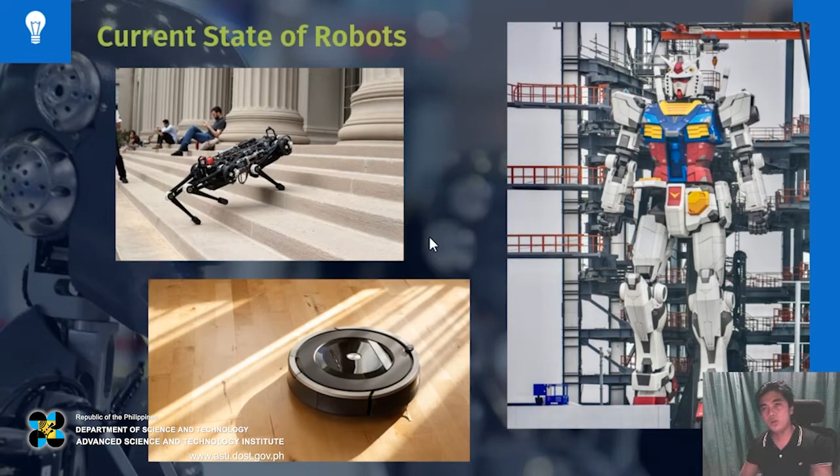That will be awesome. So starting with the current state of robotics, let us view more on what transpired for the age of robotics maybe in the last 50 years.

So anyway, diving deeper on the difference between the robots of yesterday and the robots of today, because the robots of yesterday were mostly enclosed in a separate room, in a separate space. Maybe there is this big glass in between, usually in factories.

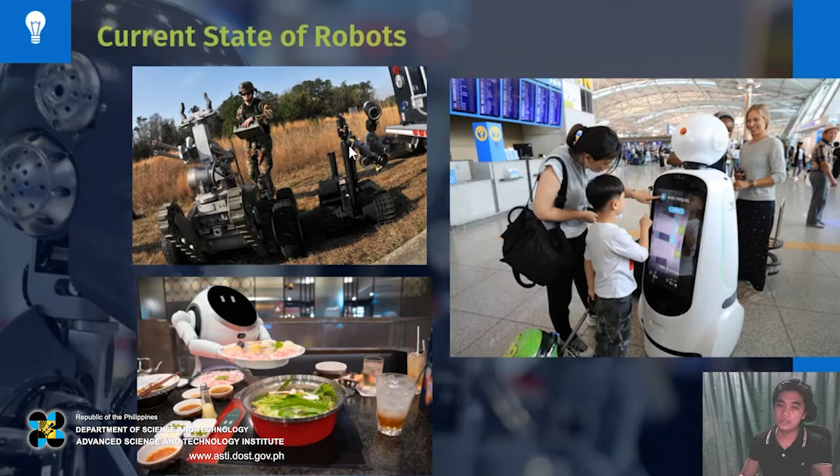So moving on, how did this transition transpire, and what enabled that? Mostly the speed of development by researchers and developers. How fast a new technology is developed in the field of robotics would mean so much more to their value.

And the role of ROS in that case, for the past 10 to 20 years, was to speed the development of robots by providing researchers the bare bones of a functioning robot. ROS does this so that researchers won't have to build a robot from scratch. What I mean by that will be explained further in the presentation.

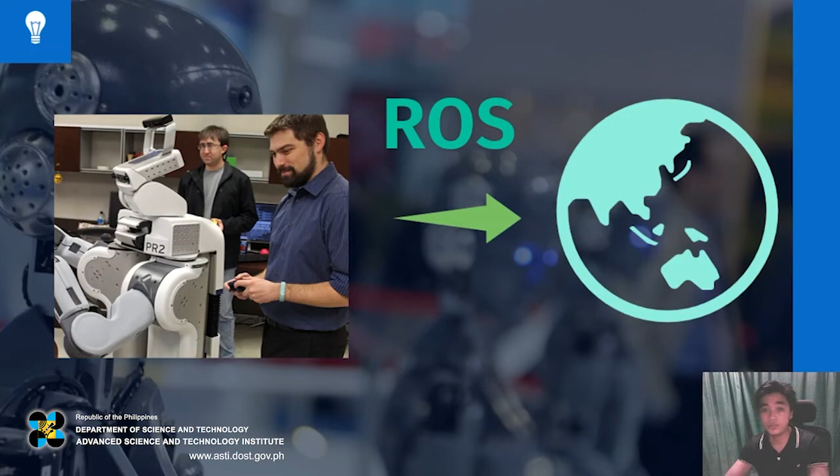So what was the driving point of creating ROS, or what was the history of ROS? ROS now is called the Linux of robotics. It's basically a multi-platform and can be used almost anywhere in the field of robotics.

These two guys started ROS: Eric Berger and Keenan Wyrobek. When they were doing their PhDs at Stanford, these two were thinking about what their PhD research topic would be about. So they were asking colleagues, experts, professors, basically any researcher in the field of robotics, just to get some ideas.

And what they discovered was something very different. In the words of Keenan, they discovered that researchers spent almost 90% of their time rewriting code others had written before, and building a prototype testbed. The last 10% of their efforts at most were spent on innovation.

What this basically means is that developers or researchers in the field of robotics mostly spent their time recreating current technology instead of adding new ones on top of that. They spent 80-90% of their time and resources building what had already been built. If you get what I mean, it's not very efficient.

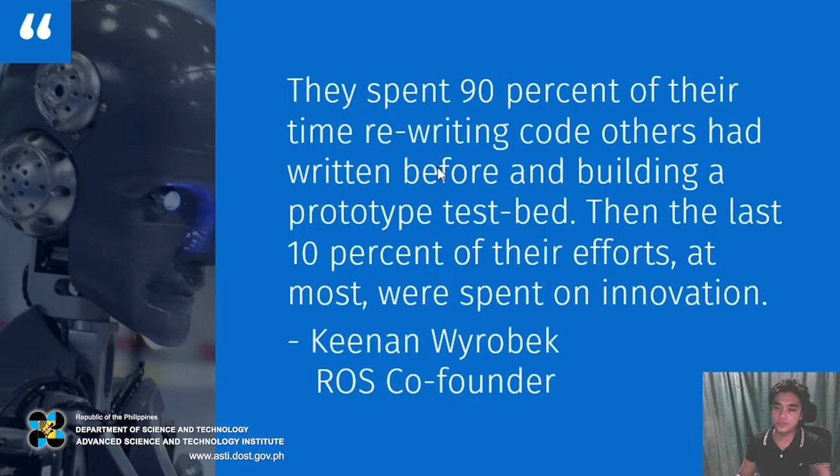With that in mind, they scrounged for funding for their research. Upon stumbling upon, I forgot her name, but someone from Apple, a former employee of Apple, gave them the initial capital of around 50 grand, or $50,000. What they did with that money was to build PR1, their first prototype or proof of concept of a robot developed using ROS.

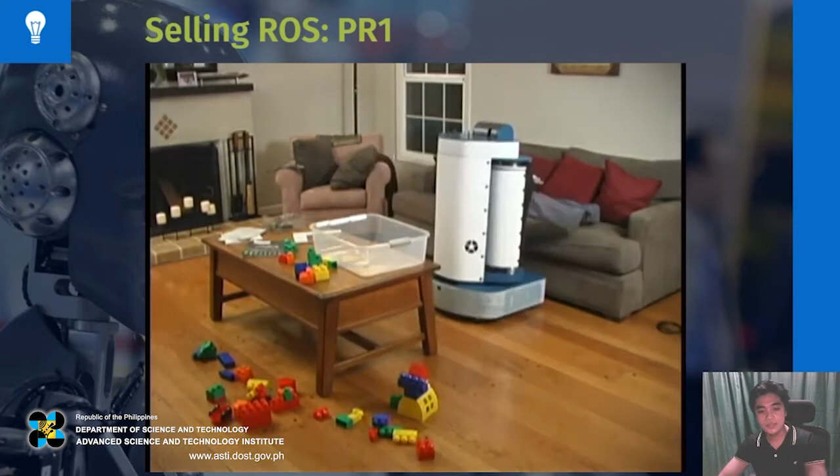So I will show you here a clip of the video of PR1. This video is sped up. Nonetheless, it is an amazing showcase of what ROS can do.

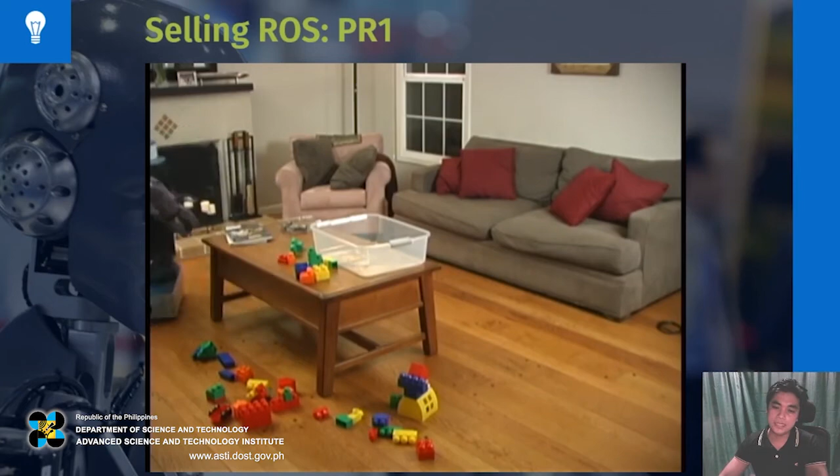As you can see here, this is a picture of the room of their roommate, I think, or a friend of theirs, and the robot is cleaning up the mess. It sorts the Lego pieces as well as arranges some cushions on the couch. Basically, they used PR1 to market their research and to further advocate for developing ROS.

And the fruits of their labor came true when they met this man. This was the turning point when they met Scott Hassan. Scott Hassan, if you don't know him, is in the leagues of Jeff Bezos, Bill Gates, Mark Zuckerberg, those big tech names, Linus Torvalds—those big tech names are on par with Scott Hassan.

Scott Hassan, if you don't know him, one of his biggest accomplishments was the development of the Google search engine. Scott Hassan gave them funding since he himself developed the Google search engine via open source, so their visions matched, and he wanted to pay it forward.

He wanted to pay it forward in terms of giving these guys funding to develop a new platform for roboticists, researchers, and developers, in order to speed up the technology in the field of robotics. So he gave them funding, and at last ROS started. That is where the Linux of robotics was born, or how it was born.

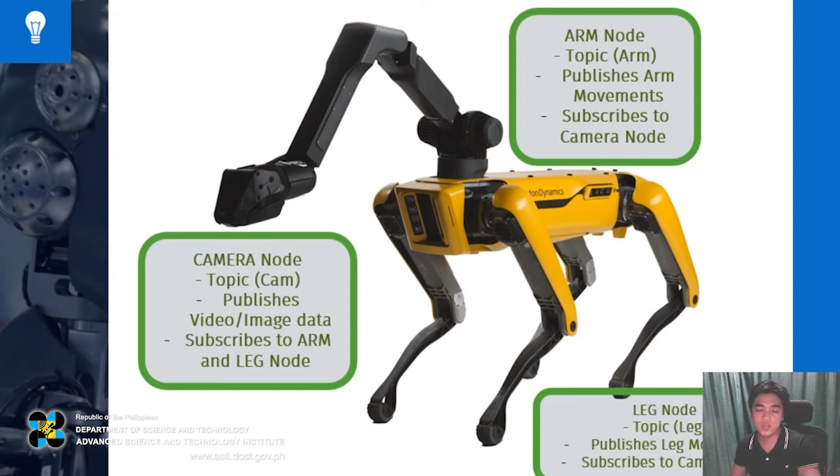So that is the beauty of ROS, you can subscribe to multiple nodes in this case. Basically, that is ROS, the open source robotics operating system that we as researchers and developers use in order to speed up the development of new technologies in the field of robotics. So before I finish this presentation and turn it over to my colleague who will present a short demonstration of what ROS can do, I say this: robots are coming whether we like it or not.

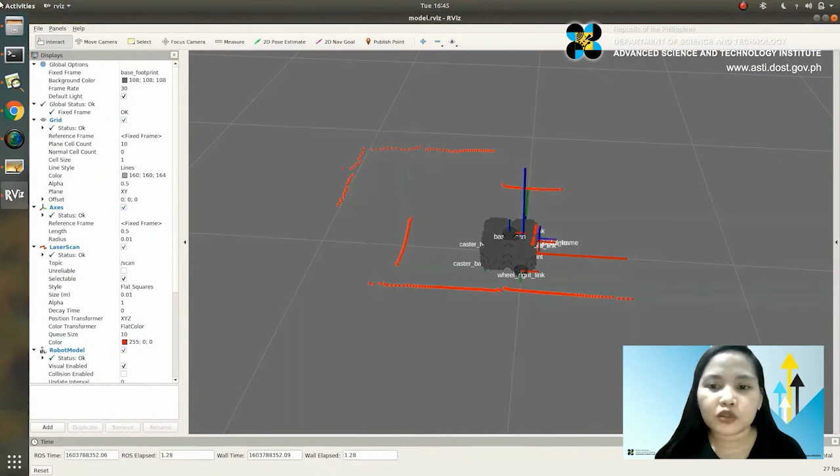To see if the robot is now live, we will run RViz. RViz is a 3D visualization tool for ROS where we can see the status of the robot.

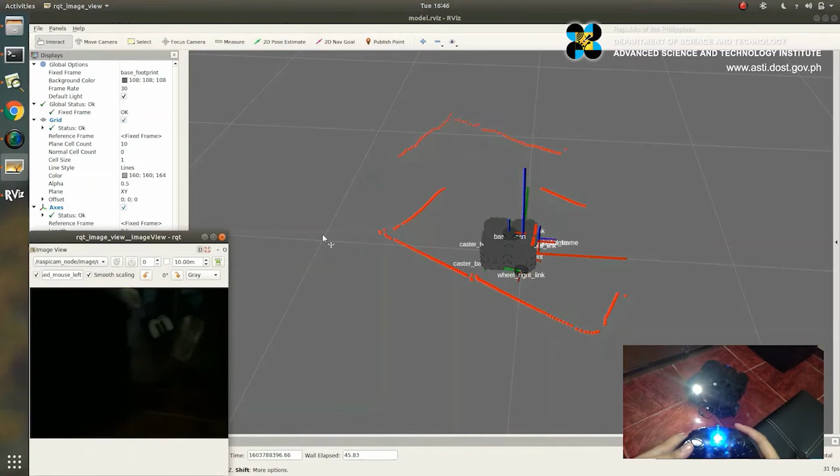Now that we have set up the robot, we can control it with the remote control that came with the Robotis package. We can now change its position, and as you can see, the wheels in RViz are turning. We can move the robot forward, backward, left, and right, and we can also change the speed of the robot by pressing multiple times on the selected buttons.

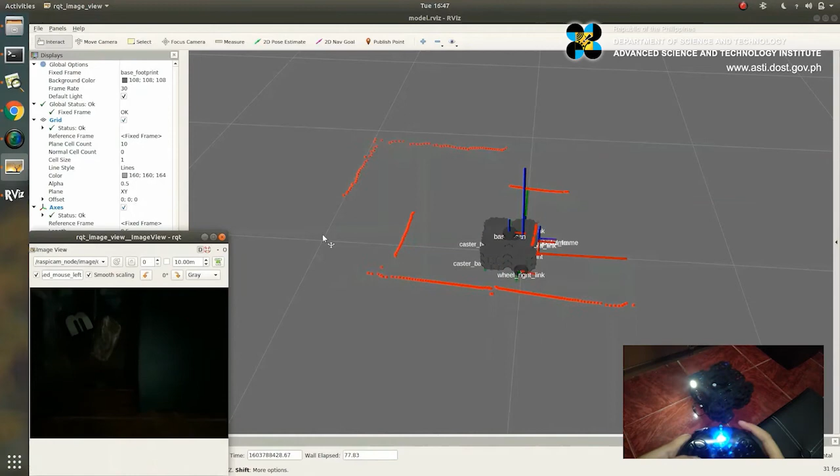Another way of controlling the TurtleBot is through a feature in RViz called interactive markers. To do this, we will simply run two additional commands to set up RViz for control.

Once the application loads, we can see the interactive markers around the robot. These are the blue and the red arrows. To move the robot around, we will simply drag the cursor to the position where we want the robot to move. To stop, we will simply double-click on the interactive markers.

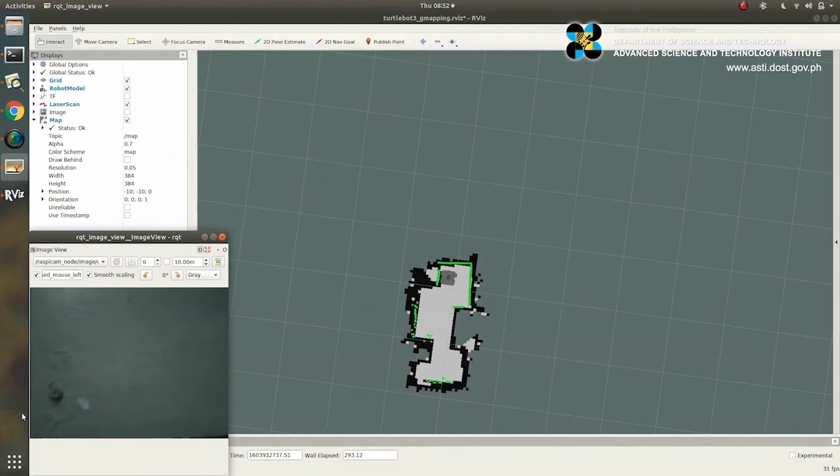Comparing it to the real-life map, it's almost an accurate representation. The white section of the map represents the tiled areas where the robot can freely move, while the black lines represent the outline of the map.